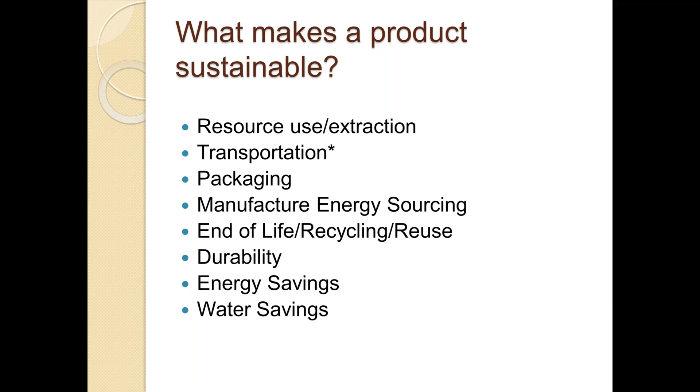I just wanted to take one example of a product, and this isn't one of our award winners, it's just a product category. If we were to look at transportation, asphalt, we're all familiar with asphalt roads, right? Well, when you're considering the sustainability of asphalt, it might seem like, well, it's all the same. Well, it turns out that everything matters in terms of how asphalt's produced, how it's laid down.

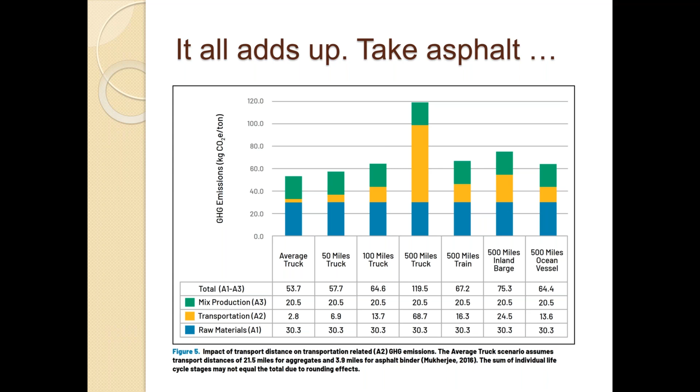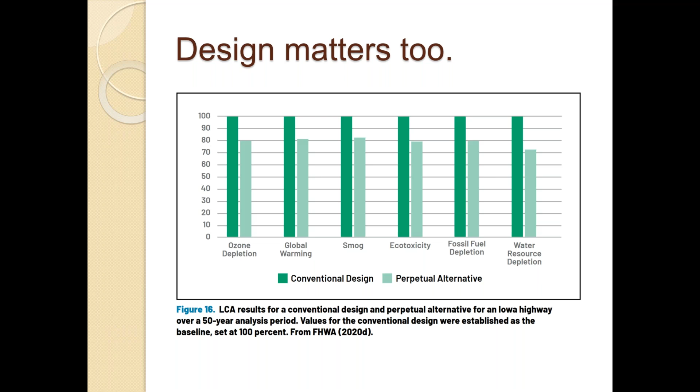So this chart shows how the distance and the type of truck has an impact on the greenhouse gas emissions of asphalt roads. Now, also, how the road is designed, how thick is the asphalt? Sometimes the lighter roads that are designed to be repaired more easily can actually be lower in greenhouse gas emissions. That's what they call the perpetual alternative, and there's a bunch of specs that go along with it. I just wanted to sort of get you thinking about all the different things that go into a product's sustainability before we dive into our own.

I also wanted to make one point. I happened to watch a George Carlin segment the other day, where he said we're not saving the planet - the planet doesn't need to be saved. He made a good point: it's people we're trying to save. I even have to remind my own writers and editors about this, because they'll sometimes use phrases like 'the planet will correct itself,' and it may correct itself without us on it. What we're trying to do is find a balance with the natural ecosystems of the planet, to tread more lightly and bring things to equilibrium and sustainability. But we are not on a mission to save the planet.

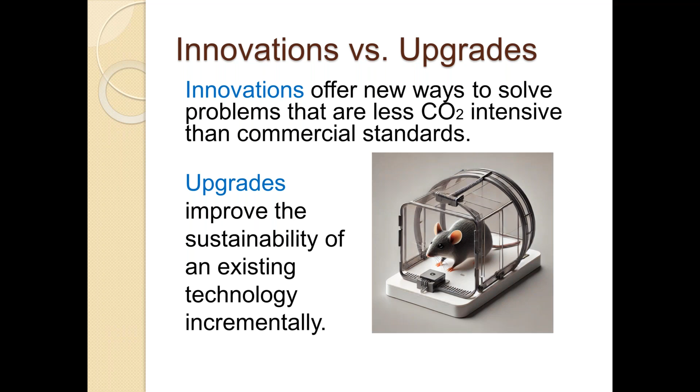Here's an innovation I wrote about this year: a DC powered pool pump. I don't know if you've seen these, but this pump runs directly from solar panels, so obviously it only runs during the day. I installed one and tested it out - the thing has extreme power, more powerful than the AC powered single-speed one that I had. That's innovative because it basically didn't exist before, and it's a zero carbon emission device, so that's kind of game changing. In my article I did say there's a couple tweaks needed before it's ready for prime time, but I'm pretty happy with the direction of that innovation - I think it definitely deserved a call out.

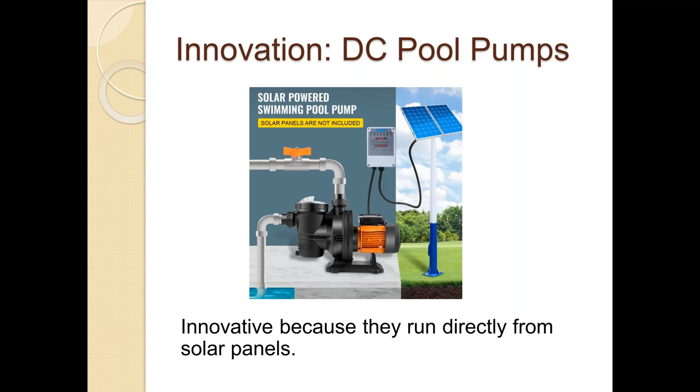Again, that's an upgrade, but a really nice upgrade.

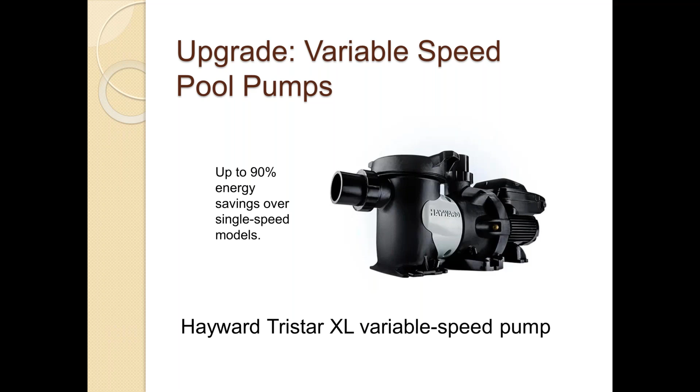Another thing we like to do when selecting these products is start from the perspective of where the need is greatest, because where is the energy going? It's pretty easy to pull up one of these pie charts about home energy use, and you can see right away there's heating, cooling, water heating, appliances, and lighting. So why not start with products that address these needs?

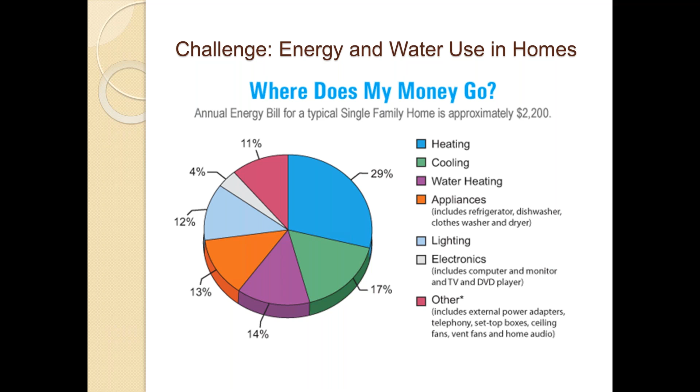But there is one category that starts even before that, at the ground level, and that's concrete. One of our winners this year was this Fortera ReAct green cement. Cement is a huge greenhouse gas producer, and this chemistry, this recarb technology, can supposedly drop the CO2 emissions from cement by about 70%. That would make a huge impact in the construction industry.

You'll often hear, oh, cement's the problem, cement's the problem. But I wanted to put cement in perspective.

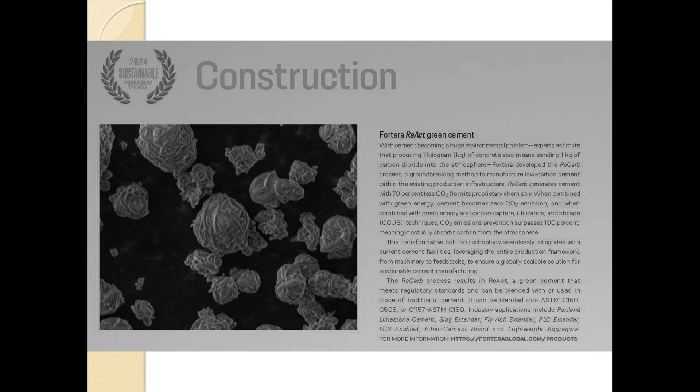So this is the breakdown of CO2 emissions from a typical modern new home. You see concrete is the light blue area on the right. One thing that surprised me a bit is the steel rebar, the orange at the bottom. It's not that there are so many steel rebars, it's that steel has a high embodied energy because it's costly to produce. It depends a lot on whether it's recycled content, but most steel nowadays is recycled, and it's essentially a forever product. But you'll notice even up top, like paint—I'm glad they included paint—there are some things you might not think about that are fairly high in CO2 emissions.

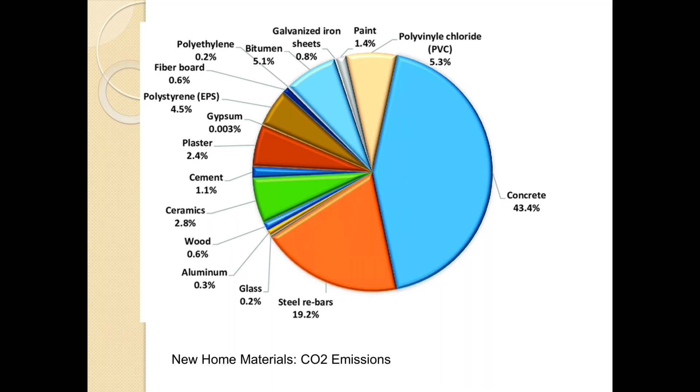There's also somewhat of a dispute about material embodied energy versus operational CO2. I was looking this morning at some different organizations, and some builder organizations weight everything towards the material side, while others weight it more towards the operational side—meaning how people live in it, what they spend on heating, cooling, painting, maintenance, all the other things that go into a house. The consensus, from my analysis of everything out there, seems to be that about 55 to 80% of emissions come during the operational period. So I think that's important to keep in mind.

So when we talk about cement usage, it's only really falling into that smaller material construction phase.

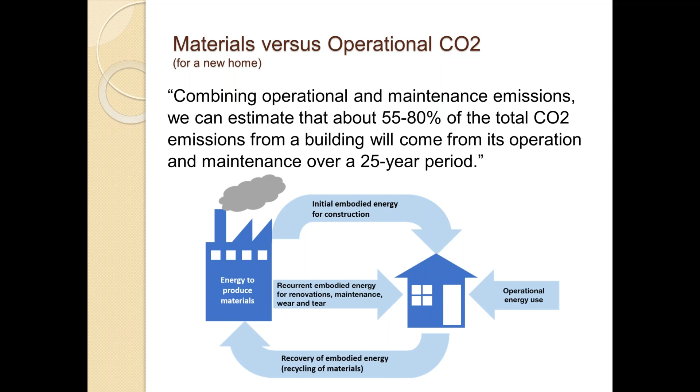To put a fine point on that: the concrete in a 2,200 square foot home is about 77 cubic yards, or 30.8 metric tons. But the average American, just by being alive, produces 16.5 metric tons a year. So the concrete in a brand new home is roughly 1.87 times the average American's annual CO2 footprint. If you switch to green cement, you could cut that down to 9.24 tons of CO2, which would equate to about 7 months of an American lifestyle.

Let me point out that every time we have another child in this country, the exponential increase in our CO2 footprint is far larger than that one-time cubic yard impact of concrete for a new home. So I think it's important, because we sometimes tend to villainize builders and the materials in new home construction, but compared with what we use on a daily basis, it's quite a small percentage. That doesn't mean we shouldn't try to rein it in, but it should be kept in perspective.

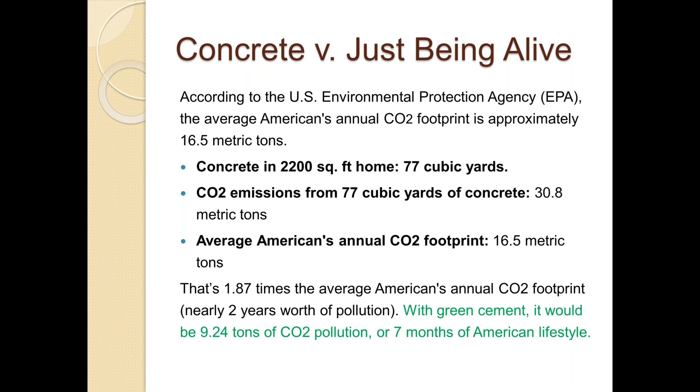Now, one reason we chose this product is that there's really not a lot of green or sustainable laminate-type flooring out there. You can find sustainable flooring like cork, sometimes hardwoods or natural woods depending on their harvest, and tile is quite sustainable, but a very popular category is composite laminates. This one I really like because they've made an effort—they're using a lot of recycled plastics, and they're not using PVC.

My problem with PVC is that it's one of the lower grade plastics, and it's very hard to recycle. Most places won't take PVC for recycling. So this product has a big chunk of recycled plastics and 80% renewable plant-based material, various post-industrial and other materials. It's a good product that's starting to deal with our plastic issue.

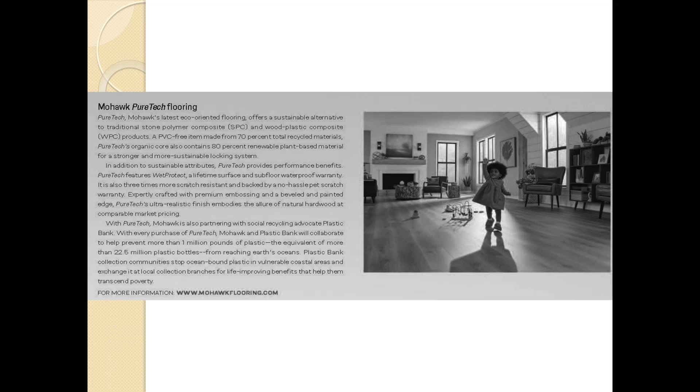What we're learning about plastics is that they're actually worse than we imagine. We know about the Pacific Gyre and these huge areas of ocean plastic pollution, but it goes much deeper. Part of the issue is that even when we do the right thing and recycle, we're really only recycling about 17% of plastics globally. The worst offenders would be that 15% that gets tossed randomly beside the road and washes into the ocean. The big dark area, 50%, is landfilled, and 18% is incinerated.

I did some research on incinerating plastics, and what we know now is microplastics are actually quite dangerous. With incineration, there's a mixed bag of research on whether microplastics are destroyed in the process. There was a study in Japan on this. I think there needs to be more research. It does give incineration less of a dirty reputation, because if it destroys plastics and breaks down the tiniest microplastic particles, it may actually be far preferable to other modes of getting rid of plastic. There are some bacteria being worked on that apparently eat plastics, but I don't know how that hasn't become commercial yet.

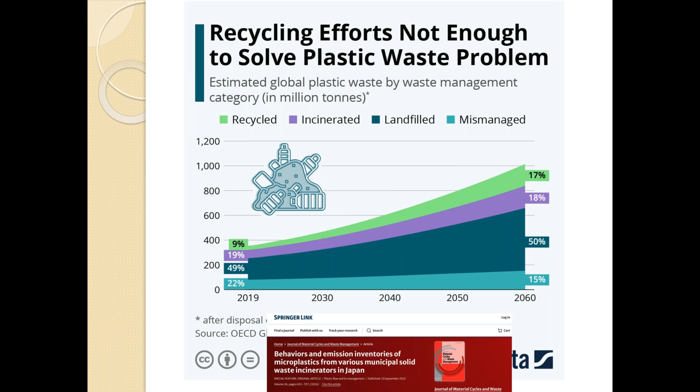That is somewhat promising. But I think the reason we need to look at plastics, and the reason I'm taking a deep dive into them, is a study just came out this March, the first one to my knowledge, linking microplastics to human health.

We know our bodies are full of plastics, right? This study found that people with heart disease have a 4.5 times higher risk of heart attacks and strokes if they have microplastics coursing through their veins. That's pretty serious, and I think they're just scratching the surface, because now they've found it in reproductive organs and people's brains. So I think one of our tasks among many going forward for the next 10 years is to get microplastics under control, along with all the other challenges facing us.

But maybe they will lead us to the same place, and maybe sustainability will converge on some of these issues.

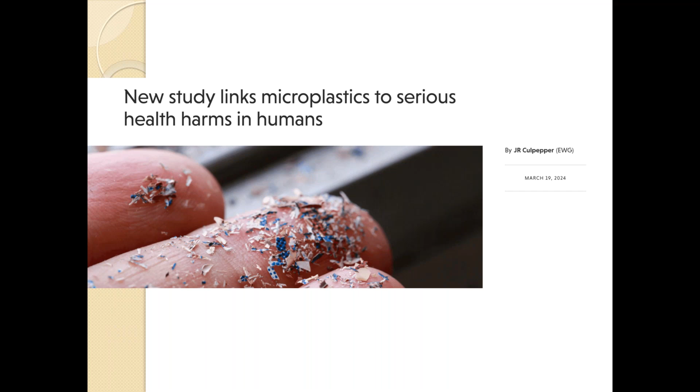This is a site I wanted to mention called Plastic Bank, where you can quickly log in or give it to your clients if they're interested. If you're trying to talk to a client about why to use products with embedded recycled plastics, this might be a place to have them look at how much plastic is in their lives and give them a little bit of awareness.

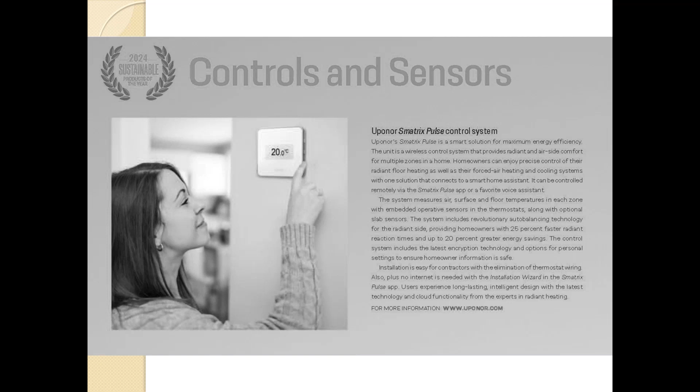The cool side effect is that it can provide some heat mitigation. Most modern homes have large window walls with sun shining in, and sometimes they don't have shading systems, so that floor heats up. In old school radiant floor controls, that floor was either on or off, but even during a winter day they can overheat. So you combine passive solar with radiant heating. What Uponor's new system is going to do is detect as the sun is heating that area of the floor, and turn down the volume of hydronic flow to that region. It's a smart system that, especially in this age of extreme heat where you don't know when you'll have a heat wave, and you don't want floors overheating, gives you extra control.

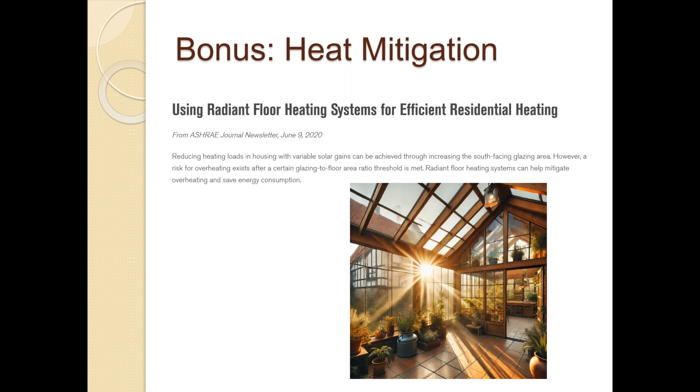But I also wanted to find out, if you compare this with a treated wood deck and look at durability and longevity, how does it pan out over time in terms of its sustainability story? And what sort of convinced me that we should put this steel framing in our sustainable products is the following.

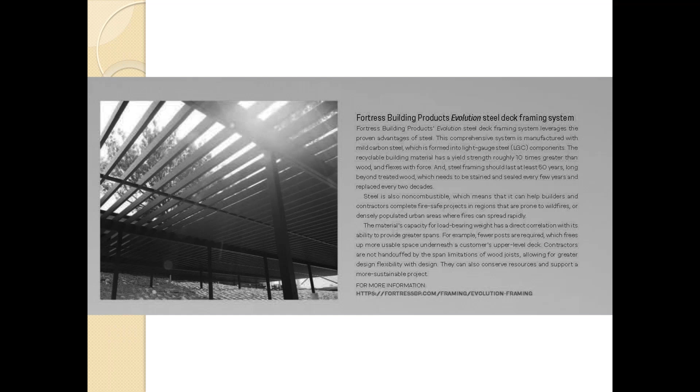So I did an analysis of treated wood versus steel framing over 25 years. So what it works out to is if you replace that deck once in 25 years, meaning you replace the wood deck — which I don't know about you, but I've put in quite a few wood decks, and I can't think of any of them that have lasted more than about 15 years, and most of them were pressure treated or CCA treated.

So you end up with a wash, essentially, with the CO2 emissions from the steel versus the CO2 emissions from the pressure treated framing for that deck.

Now, what's important to point out, though, is that steel framing is supposed to last 50 years. So essentially, if you go on another 25 years and you replace that treated deck 2 more times, then the steel comes out way ahead because you've already basically paid for those CO2 emissions. So if you are looking long term, the steel is actually going to beat the treated wood in terms of CO2 emissions. Granted, most people may not keep a place that long, but I don't believe we should be looking at the tenure of how long someone lives in a place. We should be looking at the building and its operational CO2 emissions over its entire lifespan.

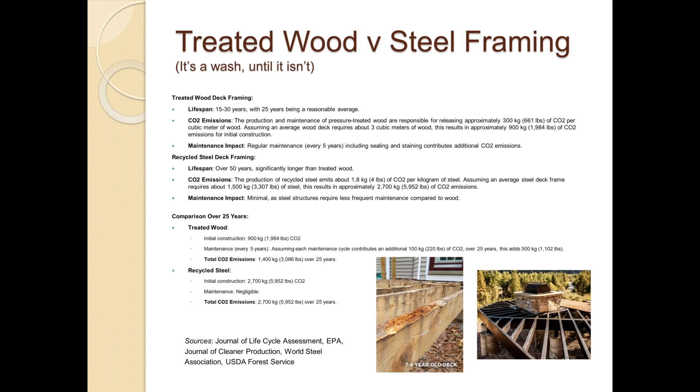This is another category which is near and dear to my heart, which is a responsive ventilation system. Now, a couple of manufacturers have had false starts with these where they've tried to put something like this together and it hasn't quite worked out.

This one, I think because they've included Awair — now I'm familiar with the Awair VOC sensors — I think what they've done is combined the smart system with these Awair VOC and particulate sensors. And then they've given this thing the ability to turn things on and off and to respond — maybe intelligently is too strong a word, but it can monitor and respond to certain situations.

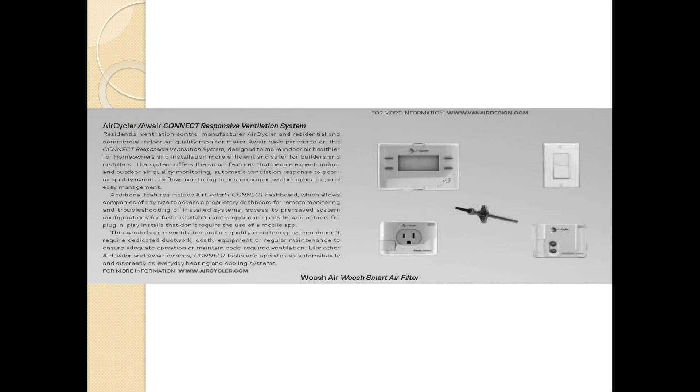So it's definitely been a white space in the market, and I'm happy to see it's finally happening. And what it will do is it will deal with some of the indoor air quality problems that we have, like this. So the more they study indoor air quality, the worse it gets.

Because especially in older homes, of course, where you have poorer ventilation that hasn't been brought up to ASHRAE standards and that sort of thing. But even in brand new homes, and I walk in them all the time, I see essentially really foolish things done, like recirculating range hood fans, which research has shown are only about 20% effective at removing particles after the filters fill up, which is quite quickly. Also, most people don't use range hoods, so they're not automatic.

And there's the problem of backdrafting, where range hoods are overpowered and they blast and pull combustion fumes from a boiler, et cetera. So all of these are problems. And I think because of COVID, people are a lot more aware now that indoor air quality matters and is affecting their health, and also are willing to spend more to straighten it out.

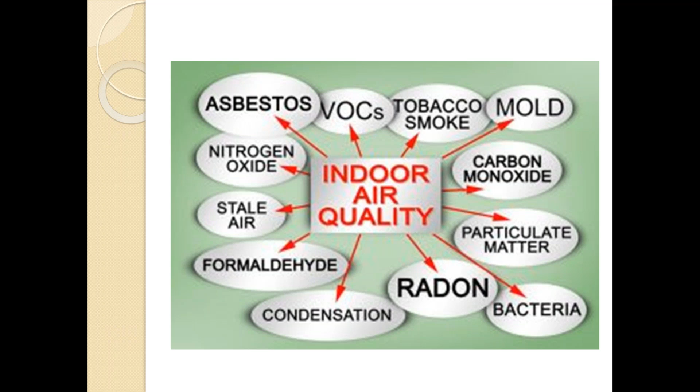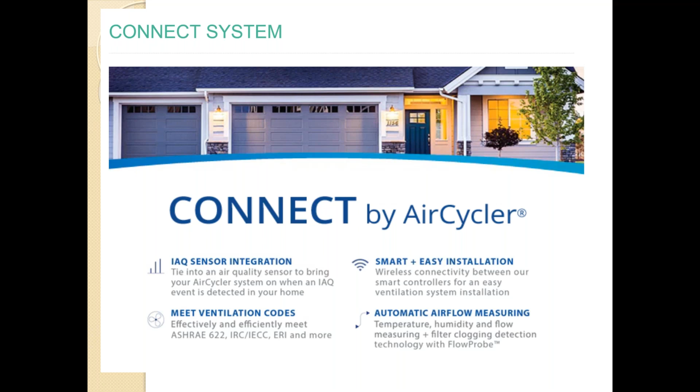This is just the advertisement for that AirCycler with its IAQ sensors. It senses the air quality and where you need fresh air and provides it. I like, especially, that CONNECT integrates with the kitchen range hood. So instead of creating a backdraft, it automatically will turn on, open a fan or open a vent and allow fresh air in. So pretty well thought out system.

I haven't tried it yet, I've only read about it. Hopefully I'll see it at the show this year and I can give you some more info in the magazine soon.

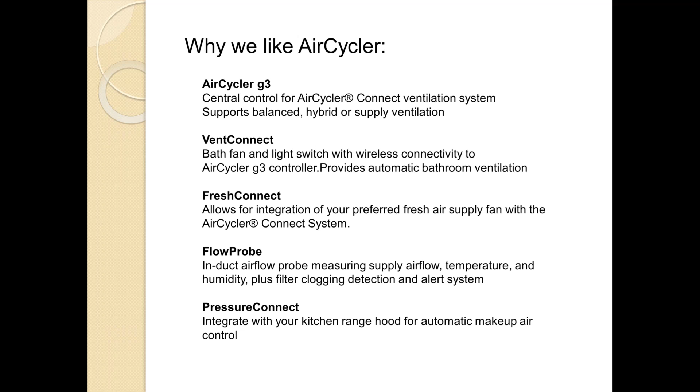Now Broan has the Overture system, which is a nice, simple version of that system. It's sort of plug and play. So if you were looking to just try something like this out, and you wanted control over some devices based on particle and humidity and that sort of thing, you might want to check out the Broan system too. Theirs is definitely in the same category, although it doesn't have to be built in, and I think it's not as full featured, but it does offer some of those same kind of perks.

Now energy management is another category that we felt was important to include in the issue this year. Schneider Electric is probably the first in, and they have these smart panels that can basically be controlled by your smartphone, and they give you a whole bunch of feedback about what's going on in the house. I believe you can turn circuits on and off, set different parameters like scenes and that sort of thing, and they've tried to make it quite easy to use too, which I always appreciate. So that doesn't seem too daunting either to installers or builders or to their clients.

Now what's driving a lot of this is, of course, the EV introduction to homes. Electric vehicles are becoming more and more common. Solar and the storage issue are becoming a more mainstream thing, and there's a reason behind that. If you look at what's going on around the country, electricity prices are going up. It's not your imagination - electricity price rose 6.2% in the country from 2022 to 2023.

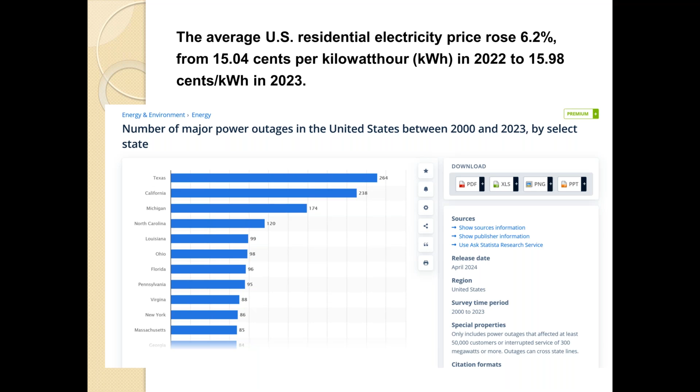This company too, I just learned about, called Savant - they also offer a smart panel that's tied into storage and a charging station, and theirs too can be controlled on a smart app on your phone. Seems quite intuitive to use. They were not one of our winners, but I just learned about them.

So the advantages of these energy management systems - you can save because they're basically looking at where you use energy and where you waste energy. So you can control it quite easily. For example, say you have a solar system and you find out that you only really need 70% of your capacity to charge up your solar battery or your EV each day. The other 30%, through the smart panel, can be diverted to a battery backup or some other use to run household things. So again, it gives you the flexibility to kind of move your energy around digitally, in kind of a fun way, which I think is cool too.

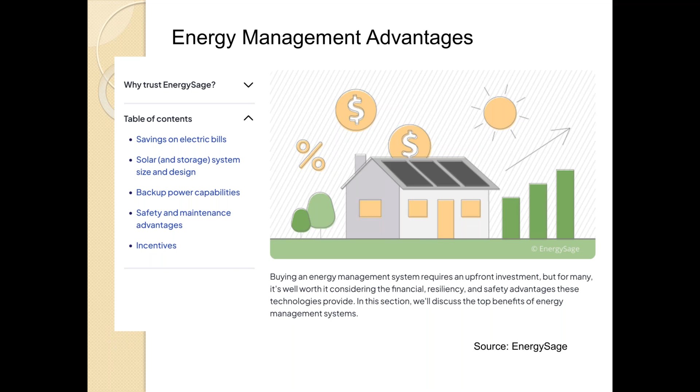On the commercial scale, this is NV Energy, another one of our sponsors. They do the same kind of energy management. If you have a commercial building, they help commercial entities figure out where their power is going. They hook them up with control systems that they can control digitally to make sure they're cooling, heating, and operating equipment most efficiently. They work with commercial operators to customize each building to the optimal energy use.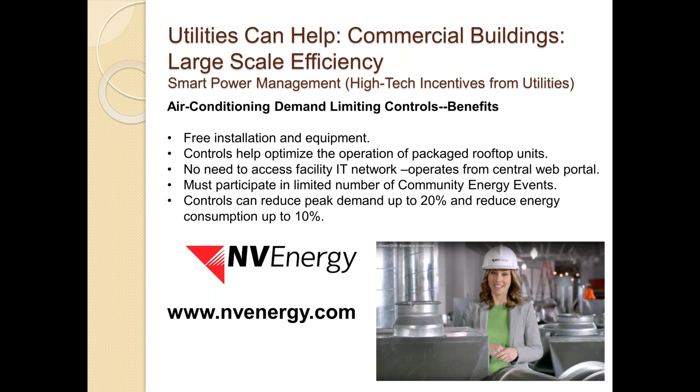Now, of course, we have to talk about appliances because it's a big part of what's on clients' minds. It may be one of the top things, and as a builder or architect, you get asked constantly about which appliance suite and so on. One thing that comes up a lot when we talk about sustainability is whether efficiency of appliances has peaked, meaning they've gotten so efficient there's really no place for them to go. This comes up with low flow toilets, for example, where they keep trying to squeeze another few drops of water out, and companies like Niagara, one of our winners, has managed to do that.

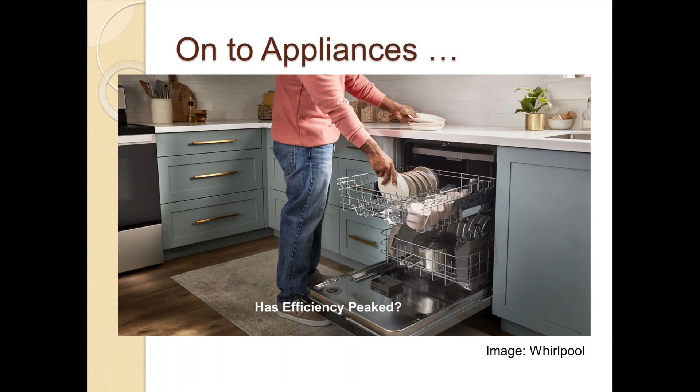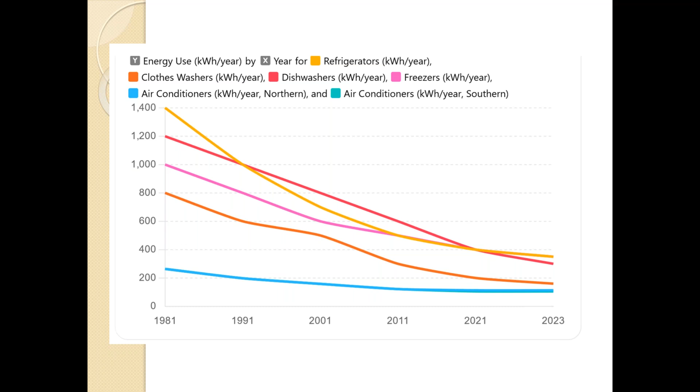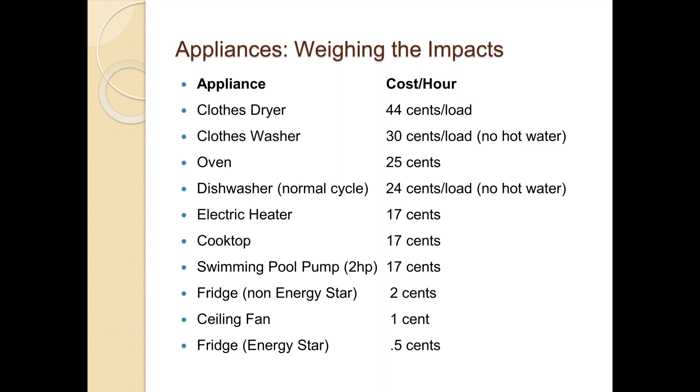Now, I know a few years back, Whirlpool came out with heat pump dryers, and I don't know how they did overall, but I owned one for a while, and they didn't seem to really take off in the marketplace. But I think that has changed with these new all-in-one products. Not only are they front loading, so they're water efficient, they're energy efficient—this is again sort of a game changer. I'd put this almost on the innovation side more than the upgrade side of things, because they're really going to raise the bar on lowering CO2 emissions for both washing and drying clothes, which is one of the big appliance energy users in the house.

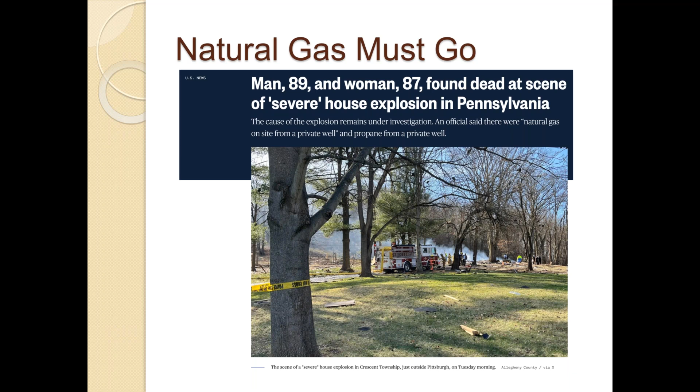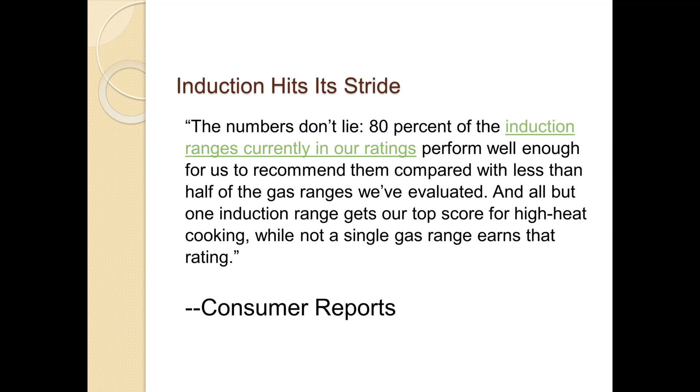So it's easy to politicize things about gas ranges and say we're trying to take away people's gas ranges, but we're not trying to take away anything—we're trying to give them something better, basically, and safer, by switching to induction. Here's another response to the criticism for induction tops.

One of the things people have complained about is that the glass surfaces get scraped. What happens is somebody buys an induction top, picks up an old cast iron pot and puts it on there, and while it heats up quickly, it scratches the surface. Well, when I got mine, I immediately switched to enamel-covered cast iron—you can also get them in aluminum—and they work fantastic with not a scratch. I've had it a year and haven't scratched the surface at all with cast iron. It's great to be able to cook in cast iron the same way you would on a gas stove, and a lot of us have iron deficiencies anyway, so it's a good way to bring some iron back into your diet too.

When you get into issues like noise, people complain about it—I've also owned those little one-burner cheap knockoff inductions, and those are noisy. They can also break if you get them wet, like if you spill water into them, which we all do. So I think we're talking about professional or residential-grade induction cooktop ranges, not the little one-off type you can buy on Amazon.

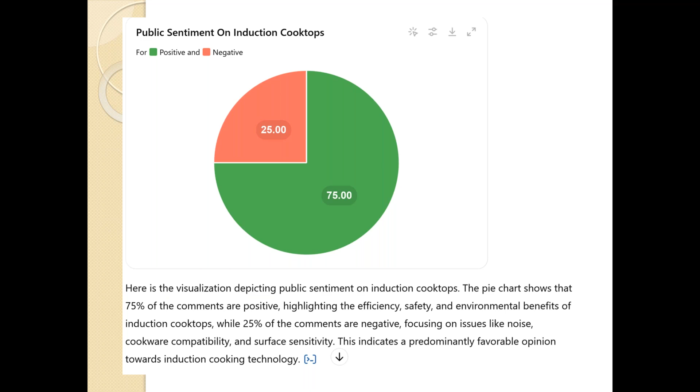Water management. Obviously it's a big issue, and depending where you live, it's a gigantic issue. Now, gray water recyclers have been around for a while, but it's hard for them to get traction, because nobody really wants to use gray water. Obviously you're not going to drink it. They want something that's hands-off, that you don't have to add chemicals to and so on.

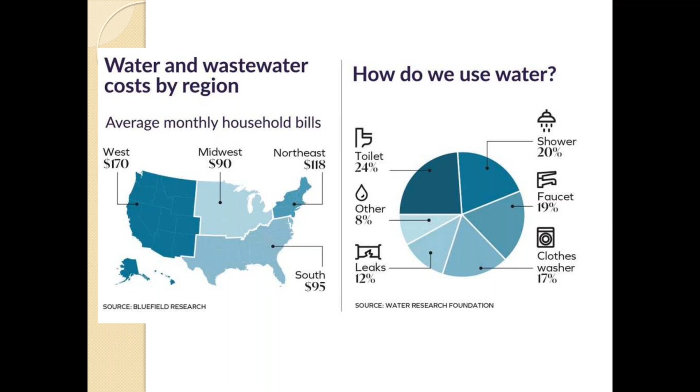So if you look at how we use water and how much it costs, what's interesting is if you look at the chart on the right, showers and faucets include more, by the way, than just the water we drink. Most of that water is not what we call potable drinking water, and yet most cities are required to provide water in a potable form. So it's one of the things that's always irked me: only 1% of our household water is used for drinking and cooking, and yet we have to condition 100% of it to the level that it could be consumed.

So if you think about it, with a gray water system, we don't have to bring in as much fresh water, because we're reusing some of the water we already have.

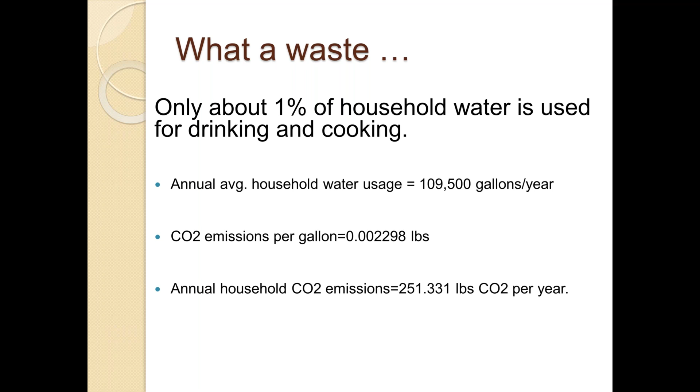Another thing I wanted to point out is that the CO2 emissions from water are significant. They're not huge—I did the math on it—it's about 251 pounds of CO2 per year for the average household. So this gray water system is more about people saving water; it's not really that much about reducing CO2, although every little bit helps.

In our doors, walls, and windows category, we picked kind of an offbeat one, which was this power shading system. What I liked about it is that it has very low energy requirements—only 5 watts. As they point out, some competitors require 30 watts per shade, so 5 watts is pretty insignificant in terms of putting these things up and down. They do come at a bit more of a premium cost, but that can be paid off quite quickly.

I actually found a study that looked at shades and how quickly you could pay them back—this is where you get your payback from a shading system, 30%. So if you're in a hot climate, it makes sense: you're going to have those shades drop automatically when the sun hits the window. It's not going to save you as much in a heating climate; it's just going to keep some of the heat in. Maybe at night you drop it down when you go to bed, and in a winter climate it keeps some of the heat in. But the real savings is keeping that beating sun out and keeping some of the cool conditioned air in.

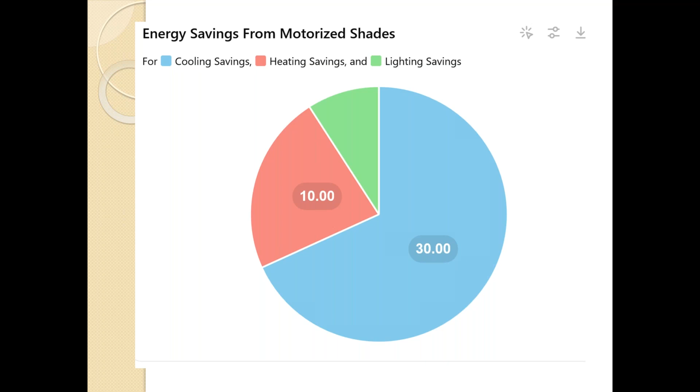This study from the American Council for an Energy Efficient Economy found that these shades have roughly a 4-year payback and last about 10 to 20 years. I think the one shown may be a little more than that, depending on the size and model, but that's a pretty significant energy savings. One of their points is that active smart windows and other high-end windows are quite expensive, and this is an alternative if you're trying to achieve, for example, a passive house or even a net zero house.

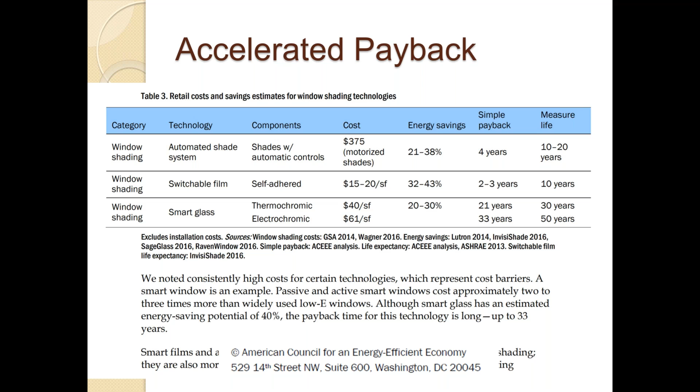Adding these automated shades might be both an affordable and a reasonable way to recoup some of that energy savings. And that is my rather short presentation this year.

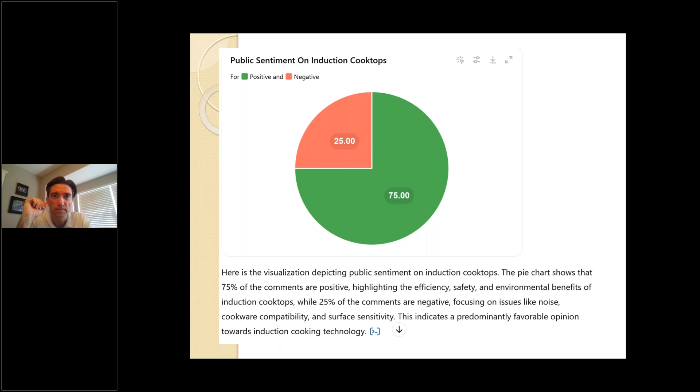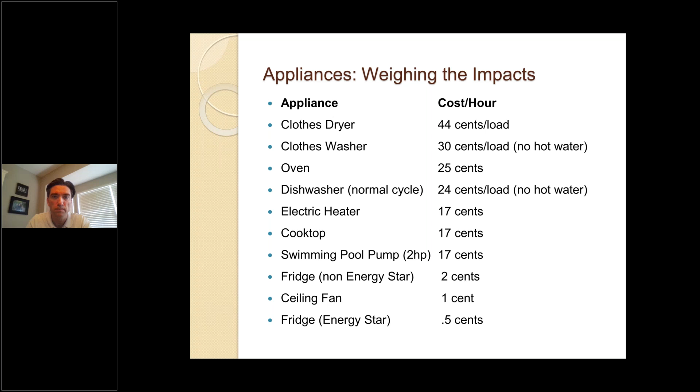I know that many of the manufacturers did a bit of a pullback this year because they weren't selling at the pace they thought they would. So it's still certainly, with the IRA federal money and other forces at work, I think it will continue to move up and forward. It just may not be as predictable in terms of how fast and how far it will go.

I think the battery issue is getting better, and they're solving some of the range issues. I did read yesterday there are a couple of new vehicles coming out that keep extending the range. One thing I'd mention, when researching whether I would buy one, is a lot of the lower priced vehicles only have about a 250 mile range. So it really depends how you're going to use it.

For a lot of people, myself included, I often have to do a 2-hour trip every week or two, round trip, 2 hours there, 2 hours back. I could just barely make it with one of those lower cost electric vehicles, but I don't think I would risk it. So just as a subject of one's choice whether to buy one or not, the range is not quite where I would want it for my particular use. I think that's going to make a big difference.

And a follow-up to that, Matt, on the EV truck topic. Maybe I'm mistaken, but it would seem that the demographic for trucks might not be too environmentally focused. So what do you see, or what are you looking forward to or predicting, for EV truck uptake?

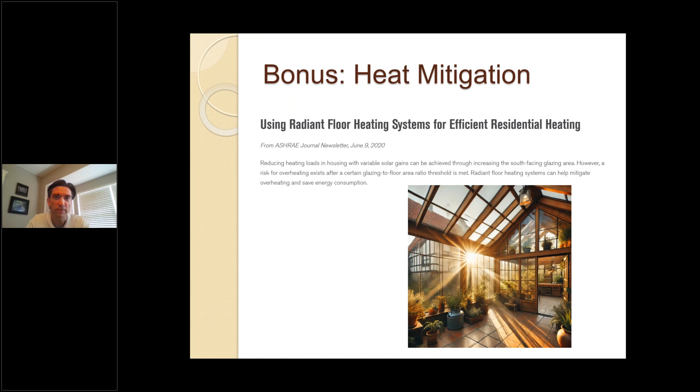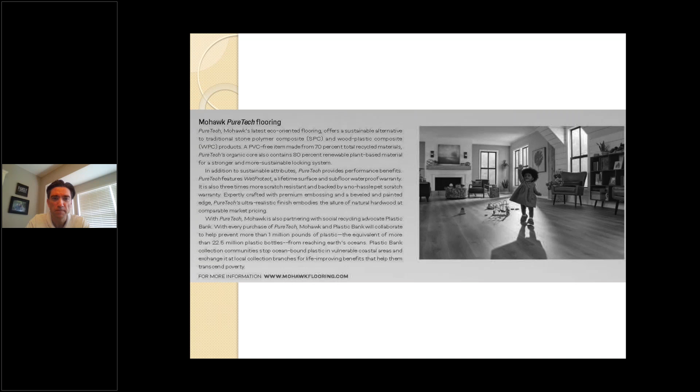Okay, yeah, because I thought, man, there's only three other main ingredients there. So right, because the cement is usually the big cost, right? Cement's the big one because it takes heat to produce cement. It takes incredible amounts of heat, which is part of what makes Portland cement so energy intensive.

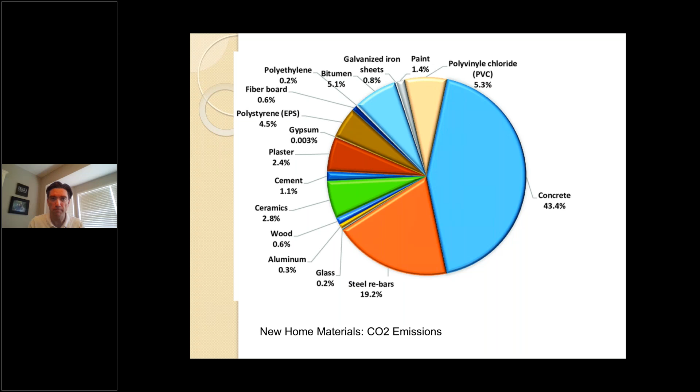We're talking about the combo washer dryers. The ones that you showed us are ventless. So I'll kind of ask that basic question of how exactly does that work? How does it intake and exhaust air?

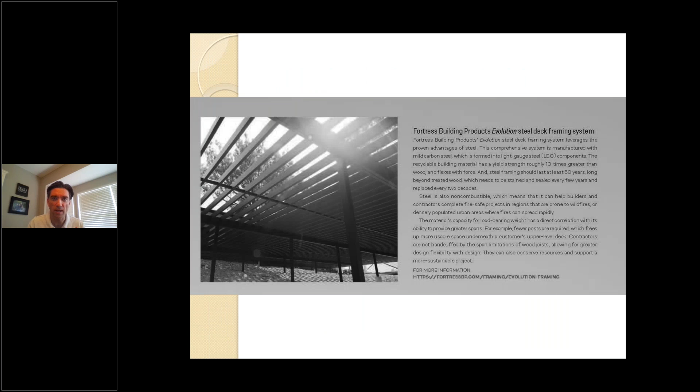If you think about it, the air that's being exhausted is not full of humidity, because the humidity is extracted from the air before it's exhausted, right? So it's pulling in fresh ambient air from around it, and then you'll have a plumbed water exit, like the wastewater. So that humidity is collected, not shot out, like it's not like an old dryer where if you didn't have a dryer hose on it, you'd be shooting humidity into your air. That humidity is condensed into a pan, flows into it, and then it's pumped out.

So the humidity is never pumped back into your living space. But I'm sure that it does draw ambient air, so you need makeup air to come from somewhere, right? This is where something like an air cycler could help you balance your airflow in that room, especially in the laundry room. If you've got a laundry room with closed doors on it, you might want to at least put a passive vent in the wall. There's some German ones I've installed before that will equalize the pressure when it pulls air in to make the makeup air for that ventless dryer.

Matt, we had a question come in from Stephen, more of an observation. He's thinking that architects and designers, along with their clients, should be talking about passive solutions to some of these issues, and he talks specifically about motorized shades. You can put permanent exterior shading elements outside, or use retractable shading that can be controlled manually, as opposed to being plugged in, even though it has a small power requirement. Want to talk a little bit about some of the alternatives?